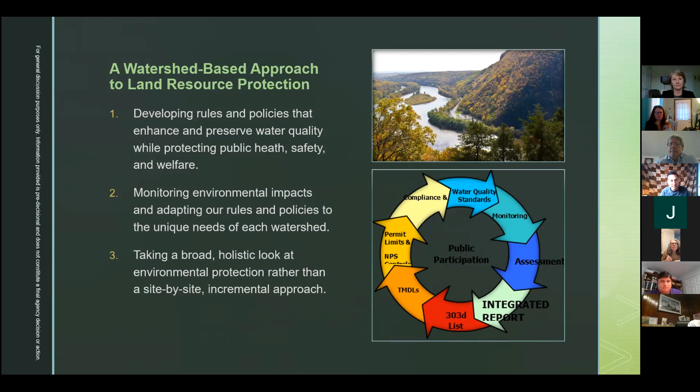Just a couple of things to remind you: we used to be called Land Use Management, now we're the Watershed and Land Management Program. The Division of Land Use Regulation, which covers wetlands, coastal program, CAFRA, waterfront development, and flood hazard area, is now called the Division of Land Resource Protection. And there's a new division called the Division of Watershed Protection and Restoration. Those two divisions are in the Watershed and Land Management Program that I'm the AC of.

Now, I think you're probably all aware of some of the history, but Executive Order 89 was the first thing Governor Murphy signed in this regard to set some goals for the state. Executive Order 100, implemented by Commissioner McCabe's Administrative Order 2020-01, basically set the DEP on a course to update and consolidate into one rulemaking package.

Some targeted and also very broad changes to the flood hazard rules, the coastal zone management rules, the freshwater wetlands rules, and also the stormwater rules. I'm not going to be talking too much about stormwater today, but that is an important component to this.

We've gone through a robust stakeholdering process where we've had upwards of 250 people or so at a time, and the conversation is hard. It took about 4 hours to get through. We had to do two 2-hour sessions to get through the PowerPoints with all the details in it. Those can be made available to you if you'd like, but today this is more of a targeted approach.

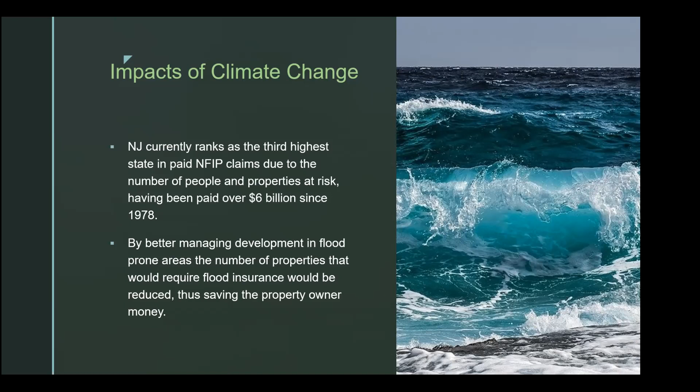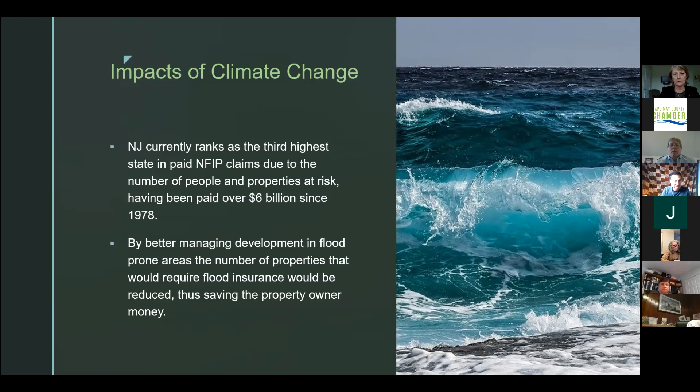And there are secondary and tertiary impacts from flooding too, along the coast. In Hurricane Sandy, 37 people lost their lives in New Jersey. But I read a report, I think from FEMA, that estimated that along the eastern seaboard, between 200 and 400 people died post Hurricane Sandy due to carbon monoxide poisoning because they had generators running and didn't properly manage them. So the long-term economic and social impacts of that kind of event are still being felt today.

So what's our objective? We intend to address the unavoidable impacts of climate change, such as sea level rise, and everything that goes along with that, through what we're calling targeted regulatory reforms that will modernize our rules and increase resiliency throughout the state.

We intend to develop regulatory standards that are commensurate with the anticipated level of risk. So the more at risk you are, the more protective the standards should be. The less risk you are, if you're on the edges of the floodplain, then the standards don't need to be as protective. We want to do what we can to provide tools to people making decisions today so they can make informed decisions.

Like I mentioned before, the things being built today are going to be around for a very long time. And so we want to ensure that the homes, bridges, roads, buildings, and businesses that'll be here 50, 75, 100 years from now are as safe as they can be based on the science that we have.

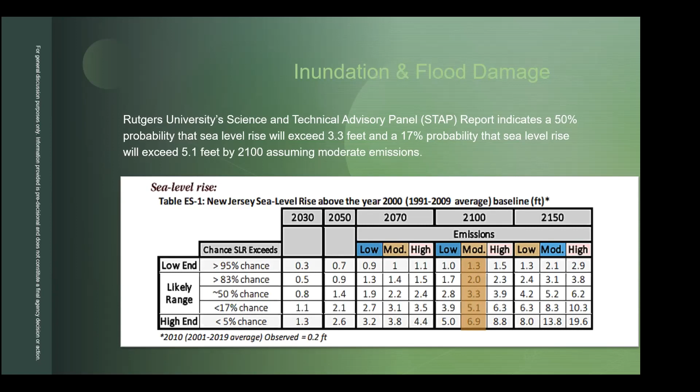So the first target is, well, which year are we going to shoot for? And so the first decision we made was to plan for a year 2100 condition, because our opinion is that buildings and roads and bridges and infrastructure are likely to be there, if not in 2100, pretty close to 2100. So that was a reasonable target for us to focus on.

Now, the second thing was, well, what percent chance? And we initially started out by saying, well, let's take a 50% chance. There's a 50% chance that sea level rise will be at least 3.3 feet, right? So we thought, okay, that's a good place to start.

But upon further investigation of the science, we realized that what we were really saying here is that there's a 50% chance that it could be more than 3.3 feet. And so here we would be asking people or requiring people to elevate their buildings, new homes going in, saying you have to be 3.3 feet higher than you otherwise would have to be. And there's only a 50% chance that's going to be enough.

So the number that we've been focusing on for the purposes of our rulemaking has been 5.1 feet. We'll say 5 feet. And that's the 17% chance exceedance. So what this is saying is that there's only a 17% chance that sea level rise will exceed 5.1 feet. And so we feel that that's a more appropriate target for public infrastructure and for buildings and things that people are relying on for their safe conduct and for their businesses.

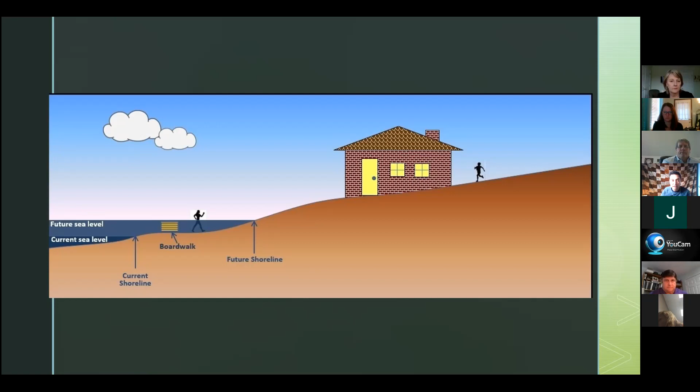So really what this means is that there are 4 different zones that we would have standards for. Zone 1 is the area that's underwater today. Zone 2 is the land that would be inundated either twice daily because of high tides or permanently. Zone 3 is the existing floodplain limits, and zone 4 is the future floodplain limits. So having standards that are commensurate with the risk level in each of these zones is important.

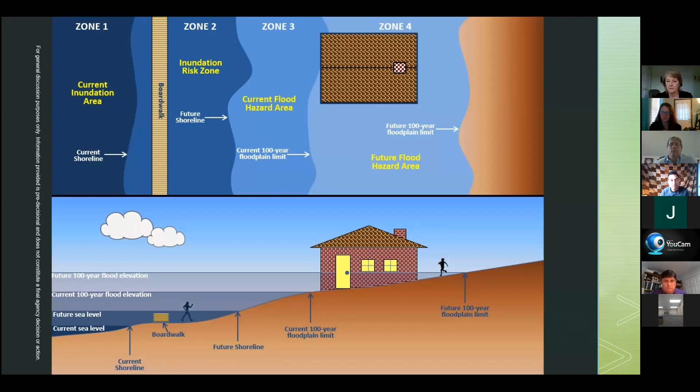What it does mean, though, is that we want to take a very close look at what happens here and make sure that we're doing everything the state and whoever's proposing it can do to make it as safe as possible.

Our plan is to provide a map that people can look at. Rutgers has a great tool right now at njfloodmapper.org. I'm going to show you a couple of screenshots of Atlantic City that show you what that looks like. You can play around with that and see your inundation levels, so you can say, okay, if I have 1 foot of sea level rise, what does that look like in my community? 2 feet, 3 feet. But what we'll do is provide a snapshot of what the 5-foot elevation looks like. We'll always give people an opportunity to give us more site-specific topography to show that they're out of the inundation risk zone if they're mapped within it.

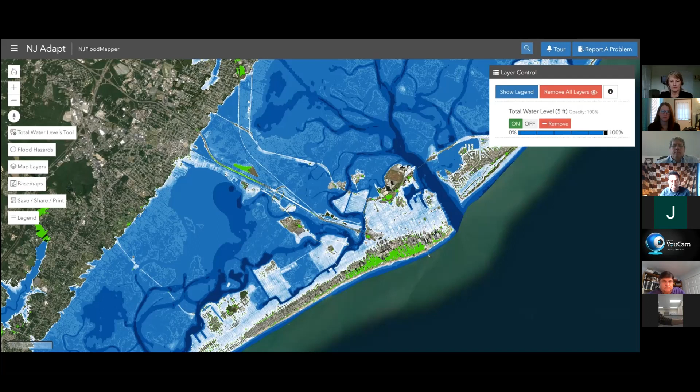I'm not sure that the evacuation routes would work. They're shown as white, so I'm not sure if they're above it or not. Portions of it look like they're out, but not completely. So this is the kind of thing we want to be mindful of - if someone were to build improvements to an evacuation route, or put a new bridge in, or put in some public infrastructure, they're mindful of trying to elevate to the extent we can. We know we're not going to be able to raise every road in the state 5 feet. We're not even going to try to do that. But when decisions are made, even 6 inches or a foot raising an intersection might make a big difference from nuisance flooding and extend the life of that before sea level rise subsumes it.

So the second piece is what happens to the tidal flood hazard area. This is a screenshot of Seaside Park, and I'm sure you're all aware of it - the V zone is the pink, the blue is the A zone. The V zone is where there's at least 3 feet of wave action on top of the still water. The line with the triangles is called the LIMWA, the limit of moderate wave action, and between that and the V zone, you have between 1.5 and 3 feet of wave action.

So there's different construction standards that apply to those areas because it's more dangerous to build a building, and there's different forces. So what we're saying here is that if sea level rise is going to go up 5 feet, then we have to assume that floodplains are going to go up by at least 5 feet. If you're in zone AE at elevation 7, that means the climate adjusted flood elevation would be 12. We're not saying roads have to be elevated to 12 or that every building can be elevated to 12, but homes could be.

And it's interesting because one of the pushbacks we always get is that, let's say a home is damaged and somebody rebuilds it and they're required to elevate it now, because all of these things look prospectively. We're not saying that anything existing has to be modified, but if someone were proposing modifications to a building or a road, or a substantially damaged building being rebuilt, it would have to be built to today's code - electrical, fire, everything else. And so the flood code is part of that.

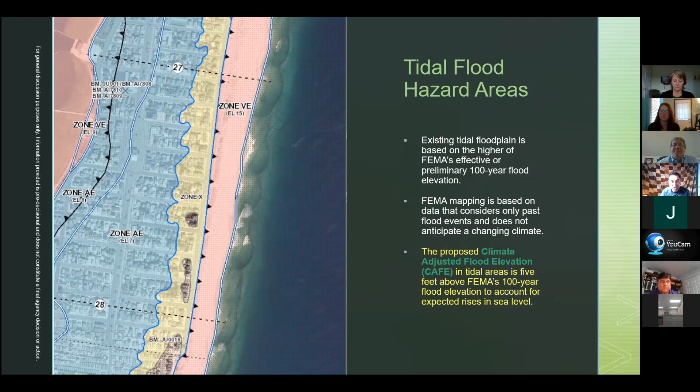A few years later, there was a flood along the Delaware, and there was a picture of his house in the paper, which I have somewhere and need to incorporate into my slideshows. His was the only house that didn't get flooded in the entire community. He actually said, cursing a bit which got bleeped out, that he was really not happy with DEP for making him elevate it, but he was the only one that didn't get flood damage. So that's kind of where we're trying to come from with this.

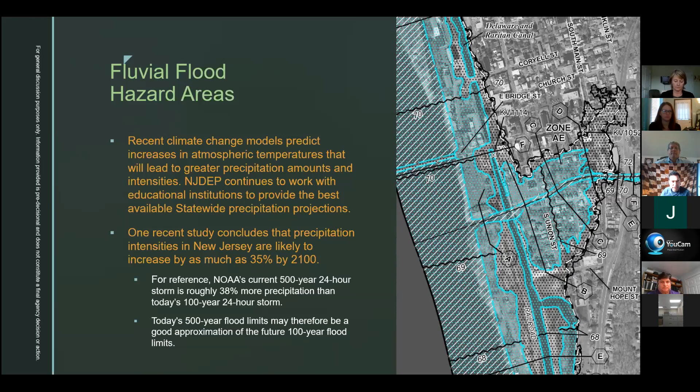Now in fluvial and riverine systems, the same type of dynamic is going to happen, but because of increased precipitation. I won't spend too much time on this since we have other things to focus on, but precipitation could increase as much as 35% by 2100, and today's 500-year flood is about 38% more water. So today's 500-year flood on FEMA maps might be a good approximation for tomorrow's 100-year flood. If any of you work in riverine communities, I'd be happy to talk more about that.

One of the things we want to ensure, and this is a disconnect we've noticed between us and local communities, is the National Flood Insurance Program and how it's administered in the state. As you know, it's a voluntary program, and communities voluntarily agree to meet minimum NFIP standards. Then people in the town are eligible for flood insurance through FEMA, with incentives for higher standards so people can get rate reductions.

FEMA recently told us that work within a special flood hazard area under the NFIP, if not started within 180 days, expires. Now our permits at the state are good for 5 years or longer, and we weren't interested in having them expire, but what we decided to do was pursue pausing the permit instead.

So we would create a free online service where people could go on and register that they've started work on their permit. If they don't register within 180 days after issuance, the permit would be paused, kind of automatically suspended. Once we hear from them, it can be reinstated, and then the 180 days starts from that point. So once work starts, you're fine.

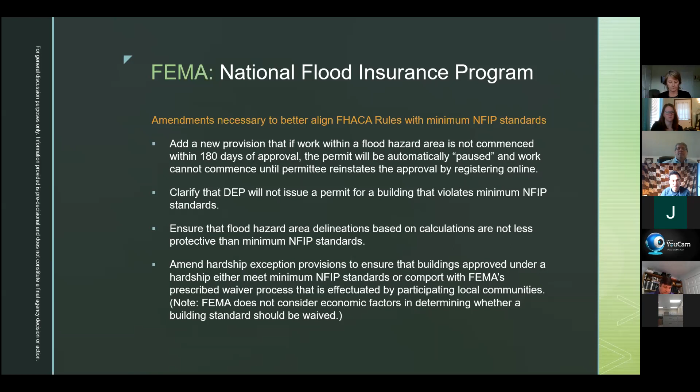There are also other places where sometimes we'll issue a permit at the state level that doesn't meet minimum NFIP standards, because a demonstration is made to us that it's okay. That puts the local floodplain administrator or local construction official in a difficult position, because the state has issued a flood or coastal permit that says it's okay. Most people presume that means it must meet minimum NFIP standards, and that's not universally the case. So we're doing what we can to align our standards so it helps everyone across the board.

There are a number of places where we intend to increase our protection of land and water resources. In our CZM rules, our CAFRA regulations, these are some things we intend to do: clarify that the presence of engineered dunes does not diminish the importance of other dune areas. These are kind of clarifications. There's a special area called the erosion hazard rule, which we would revise to complement the inundation risk zone, so that it would be the same in both the flood hazard rules and the coastal rules.

Add standards for pre-storm activities on beaches and dunes, where certain types of work are proposed, this is similar to an existing standard but broadened - traffic level D, a measurement of the ability of traffic movements to occur, should not be diminished below that. More importantly, and this applies across the board no matter what kind of permit, we're asking people to contemplate the impacts of climate change on the viability of their projects.

Based on the size of the project, the number of people that are going to rely on it, and the potential loss that could happen, both economically and to society, if that structure is inaccessible or lost - this is important. For example, somebody building a new hospital - we want to make sure people can get to the hospital, and that it's not built on an island in the floodplain that no one can get to during a flood.

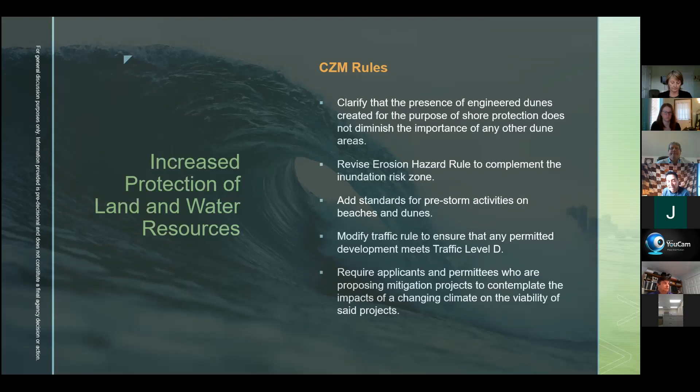Now maybe there's no place it can go other than the flood zone, but maybe there are places where it can be at less risk than others. There could be places in a community where flood elevations will be 1 foot instead of 3, 5, or 8 feet. So it's having that conversation during the design phase of a project, so we can be part of it and help everybody make informed decisions.

There's a lot of detail on the next few slides. I'm just going to give you some highlights, but you can go back and read it, and if you have any questions, you can ask me.

Expanding under the flood hazard rules - the flood hazard rules are incorporated into the coastal rules. So if you get a waterfront development permit or a CAFRA permit, we perform a review under the flood hazard rules as part of that permit if you're in the floodplain, which most of Cape May County is. So most of these standards would apply. A lot of these things are based on riverine systems - if the stream drains less than a certain amount, we're beefing up our standards.

Placing riparian zones on non-ocean front sides of barrier islands. Right now, barrier islands along the coast don't have riparian zones, which is like a setback from the water that we look at to protect vegetation and ensure development happens responsibly. What's interesting is that in the way the rules are written, the mainland side of the bays has a riparian zone, but the barrier island side doesn't. We're not talking about the ocean front, because that has dunes and beaches and different standards that apply. But we want equal water quality protections across the state - that's part of the proposal.

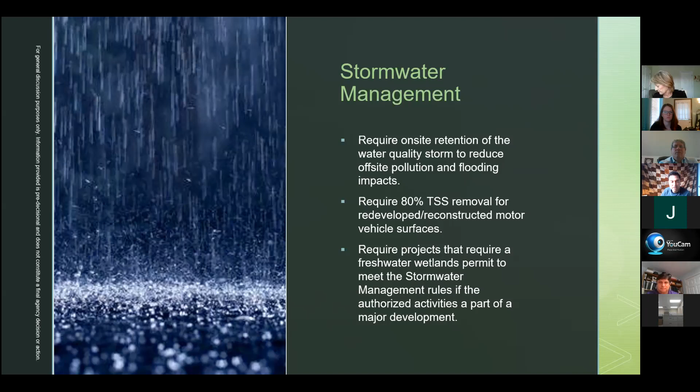Nature-based solutions—there are several slides dealing with this, but I'll go through it quickly because I want to make sure you have time to ask questions.

From the available science and our experience at the state, shorelines protected using vegetation in concert with things like rock and wood tend to last longer and be more resilient than bulkheaded areas. Bulkheads can be undermined, they can collapse, there could be catastrophic failure. They can't adapt to the changing climate the same way a nature-based solution could.

So we're doing a few things with regard to this. One is providing incentives for nature-based solutions, so if someone were to stabilize a stream bank, ocean bank, or bay, we'd want them to go there first. We recognize not every case can support that—you might not have the room for nature-based solutions, or so much erosion that it's not sustainable and you need hard armoring. That's fine.

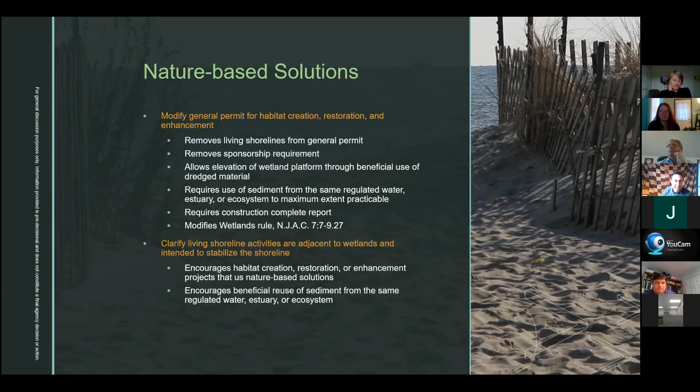Again, modifying the living shoreline rules to remove limitations on placement of fill, addressing ecological risk. We'll come back to this if you want to talk more about it.

Renewable energy—this is difficult because we want to promote renewable energy, but in a way that's environmentally responsible. So we're trying to strike a balance between maintaining habitat, like shellfish habitat, while encouraging renewable energy.

A lot of these offshore wind projects are miles off the coast outside of New Jersey waters, but the transmission lines have to come through to the mainland, meaning large transmission cables sometimes pass through shellfish habitat. The rules don't really speak to this—today they talk about communication cables, not electric cables. So there's no depth requirement, no plan to mitigate, offset, or evaluate shellfish habitat impacts, because it's not something we see today.

So our rules would include standards that balance that, because we want to protect shellfish habitat and the commercial fishermen's interests, while also trying to promote offshore wind to the extent that we can.

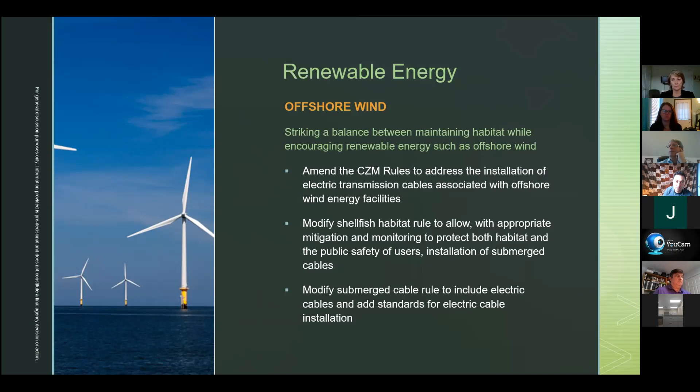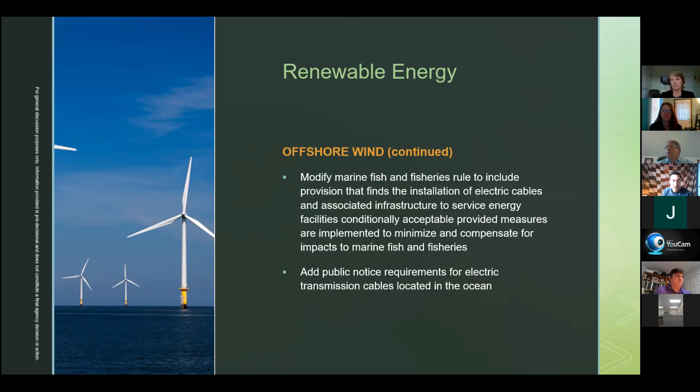So we'd have to modify the marine fish and fisheries rules to include a provision that finds that the installation of electric cables and associated things are acceptable, conditionally acceptable, as the language is often used in CAFRA. This means it's fine as long as you make certain demonstrations, and we'd increase our public notice requirements so that people who might be impacted by this would be aware of it.

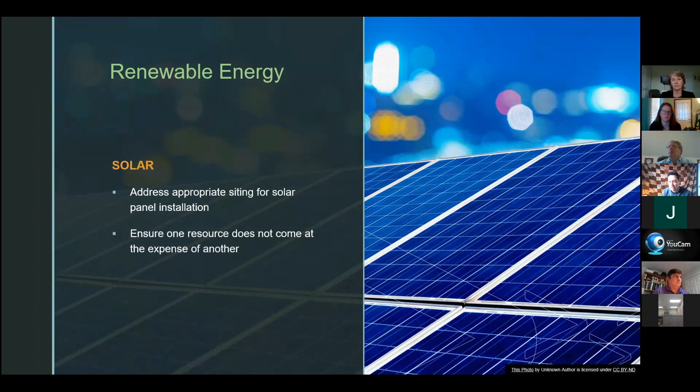Solar is another thing too. There's not a lot that we've been contemplating with solar. We looked into requiring certain size buildings to have solar on their roofs, but that proved economically unviable because of the structural impact to the building. Also, BPU has certain limits on how much energy a building can generate through solar panels, and the Uniform Construction Code says we can't require certain types of things. So we're trying to work through some of the details of this.

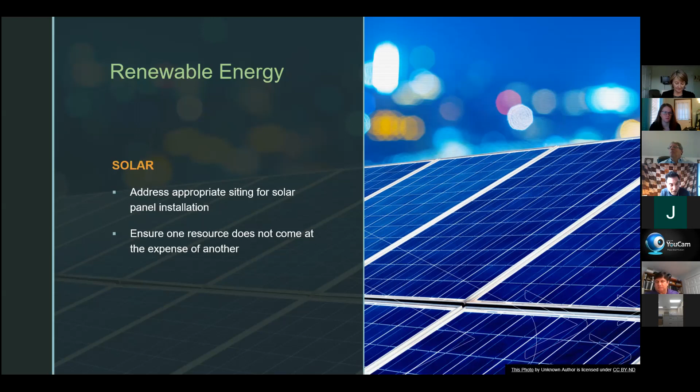What we do want to do is incentivize placing solar panels in areas where there's already disturbance. One thing I always point out is that if someone's putting in a parking lot, and they put a solar panel canopy over it, the rainwater doesn't hit the parking area, it hits the solar panel instead, so it doesn't need to be treated for water quality. Not only are people happy because their car doesn't get wet and they can walk to it during rain, but the developer also saves money because they don't need water quality treatment for that stormwater.

The last thing I wanted to cover was some of our process improvements. We have a lot of what are called permits by rule today. Between the flood hazard and coastal rules, we have about 90 of them. The way permits by rule work is that these are small activities people can undertake with no noticing to us, no application to the state, so we don't know they're happening. FEMA doesn't really like that, because we're authorizing these things without knowing about them, and there's no way to track it.

So if somebody's putting an addition on their house, or there are minor road improvements or things like that, there's no ability for us to track it, to monitor it, to look at it on a watershed basis, to see how much impact is happening and what the impact level is in a given watershed. So what we're doing is contemplating creating an online system for this.

If somebody wants to undertake one of these permits, we're going to call them permits by registration, because you have to register for them. You go online, register, and provide name, address, lot, block. If it's a utility line, pipeline, or roadway, there'd be a drop-down box for that, and you'd identify the activities you're planning to do. It goes into the system, and the person gets back a free PDF letter saying thanks for registering for these activities. It's in our system, so DEP enforcement can monitor it, and the person can show it to their town construction official to prove they registered for the activity. We think this will help us keep track of what's going on, and adapt our rules going forward.

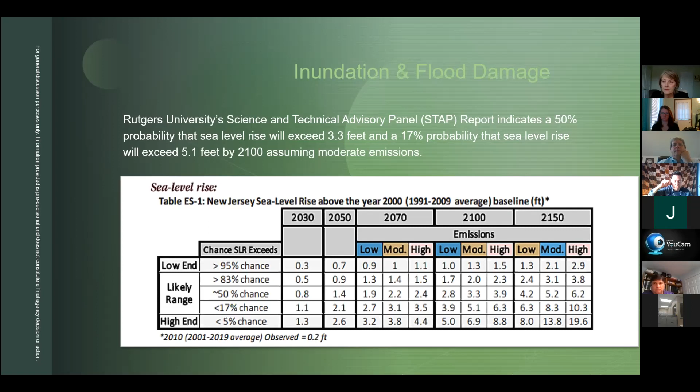South Jersey has two things going against it with regard to sea level rise. One is that sea levels have been rising relatively linearly. The other is subsidence in the ground due to groundwater extraction. Also, North Jersey was under glaciers during the Ice Age, which pushed down the land there and kind of raised the ground a bit in South Jersey. The ice is gone, and South Jersey is slowly subsiding, so we have that dynamic of the ground sinking while the water rises. It's measured at Atlantic City at about 4 millimeters a year.

I saw a graph from 1913 to around 1990s or 2000 that was relatively linear, but it seems to be accelerating because of emissions and the warming of the atmosphere. The STAP report shows that from 2001 to 2019 there was a 0.2 foot observed rise, averaged by 2010. So it has already been seen happening, and it's accelerating.

The next question is what time horizon do other coastal states use? Are they using 80 years with less than a 17% chance of occurring? For sea level rise, I don't know that anyone has gone as robust as we have along the East Coast. Some states have talked about incorporating more freeboard, taking the base flood elevation and adding a certain amount to it. I'm not aware of anybody that's gone more than what we're proposing.

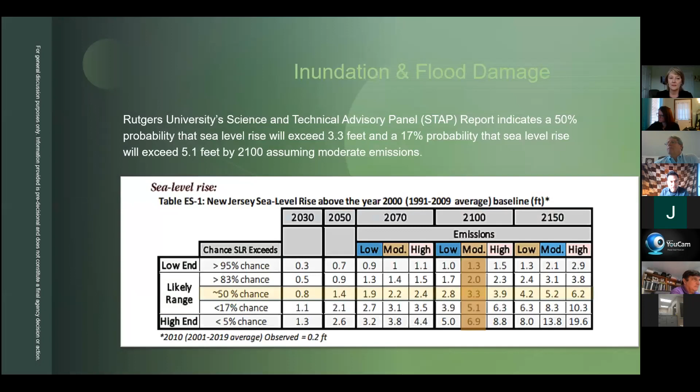I'd have to look at the elevations of the parkway, but a good way to check that would be to go to NJFloodMapper.org - let me pull it back up so you can see it, you can write it down if you want. You could put in a 1 foot, 2 foot, or 3 foot sea level rise and correlate that to the table there. So you could see, say, there's a 50% chance by 2050 that it's going to be this much - let's see what Cape May would look like at 2 feet or 3 feet or whatever. That way you can see how vulnerable portions of the community are.

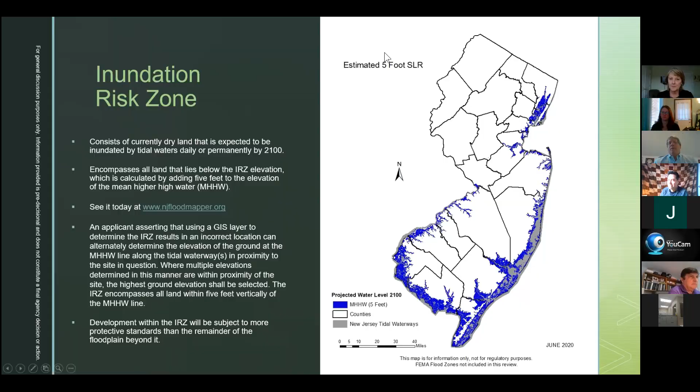This is a very complicated issue, and when you try to regulate it, it gets even more complicated and tough to digest. I read the Rutgers report last night, and while it was comprehensive, it's a lot to absorb for the naked eye. I wanted to see where your numbers were coming from. It's a judgment call, but I know the STAP report was intended to help the DEP regulate impacts from climate change. I know these rules will have a fiscal impact on many communities, governments, individuals and businesses, so there are valid concerns about what we'll see in the proposed rules. I'll say you've been very fair—you've had at least 3 stakeholder meetings since last March. Do you have another one planned before the rules are proposed, to give stakeholders a chance to weigh in after they've had time to think about this?

We've actually done, counting internal meetings with other state agencies, about 37 stakeholder meetings across the board, so we're a little tired. I'm not sure if there are any more on the books right now—I don't think there is, but that doesn't mean we couldn't have one. If there's interest, that's something we can certainly talk about. I think what we've tried to do is transition away from large sessions—like the last one you were on, which had almost 300 people, making it hard for people to ask questions and really get into the weeds. So now it's more targeted: when groups like yours are interested in hearing from us, we say okay, let's have that conversation. That's pretty much the stage we're at.